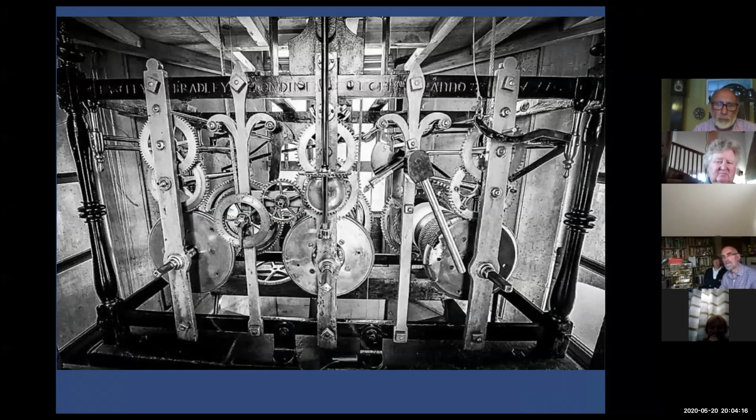He'd worked closely with Christopher Wren on several of the city's finest churches, such as St Magnus the Martyr on Lower Thames Street in 1709. In 1711, he manufactured and installed a clock at Hampton Court Palace to drive the ever-troublesome astronomical dial, and manufactured the wonderful clock as can be seen in this slide in the Townsend Tower of Blenheim Palace in 1710.

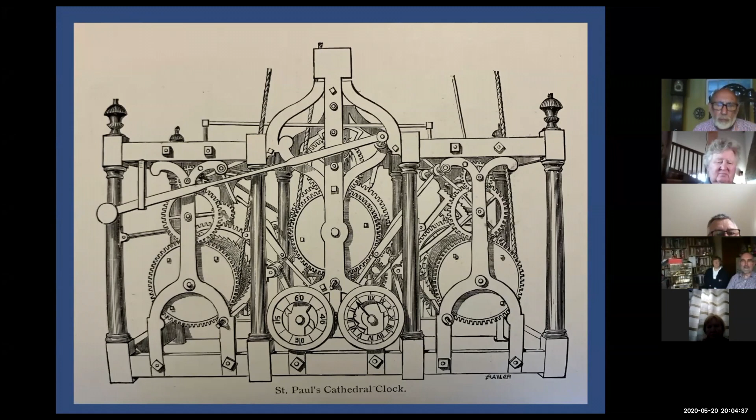But without doubt, the jewel in his crown was the clock he built and installed at St. Paul's Cathedral in 1707. Sadly, this clock was removed when the existing Smith of Derby masterpiece was installed in 1893. All we have is this sketch in J.W. Benson's book, Time and Time-Tellers, along with the original specification supplied by Langley Bradley, that leaves us in no doubt.

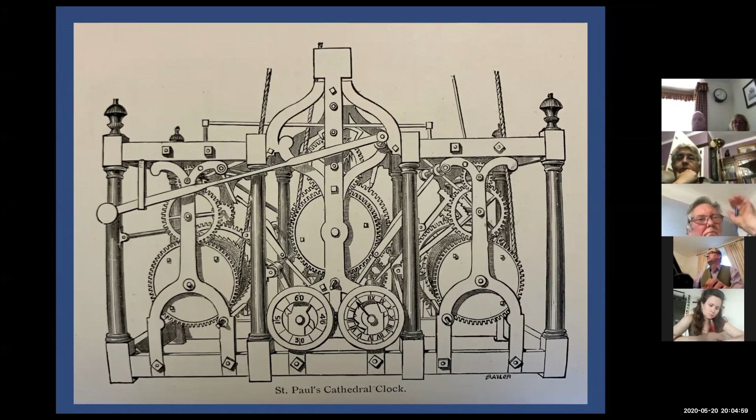I'll read the specification. The frame of the clock to be made of new iron, in height 6 feet, in length 8 foot 7 inches, and in depth 2 foot 6 inches, and the said frame to be well and sufficiently braced, the 4 corner pillars to be turned, and the base to be 4-inch square, and brass urns on top of the said pillars. All the wheels to be made of brass, the great wheels to be 2 foot 6 inches in diameter.

And about 1 2/3 inches in thickness. The second wheels to be 1 foot 6 in diameter and about 1 inch thick, and the third wheel to be 1 foot 3 inches in diameter and proportional in thickness. All the pinions to be hardened, all the holes wherein the pivots work to be stopped with hardened brass, collets to be turned on the foresaid, barrel caps to be brass and about 20 inches in diameter, to wind up brass wheels and hardened pinions.

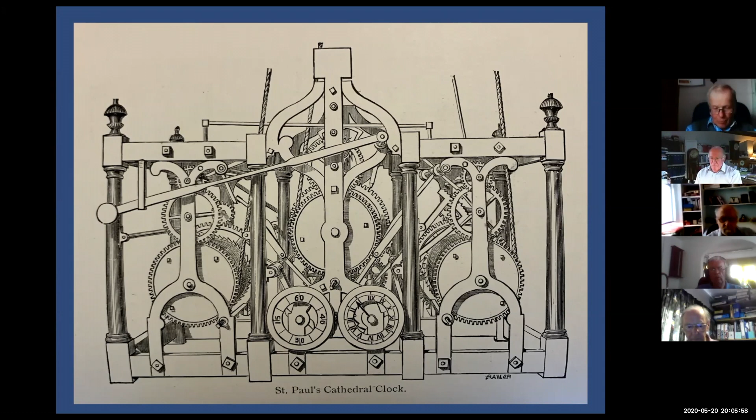All the dial wheels, roundels, dial centres, dial work to be made of brass with a fair dial plate marked on the movement to show the hours, minutes and seconds within the tower.

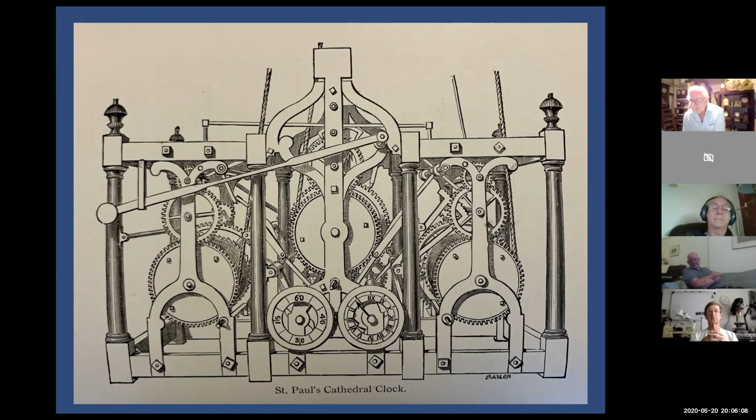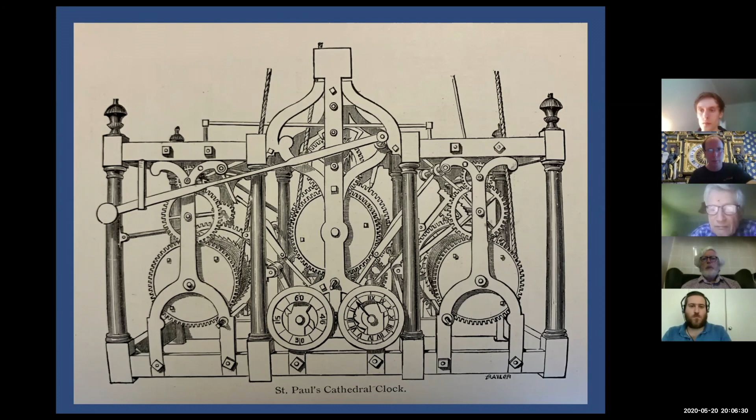I've also found recently another reference in J.F. Kendal's book, A History of Watches and Other Timekeepers, which confirms the description just quoted, but interestingly also informs us that the frame and the columns, rectangular base plate and the supporting entablature were made using cast iron, one of the first examples of this material being used in turret clock manufacture.

And I think we can all agree it would have been a wonderful mechanism.

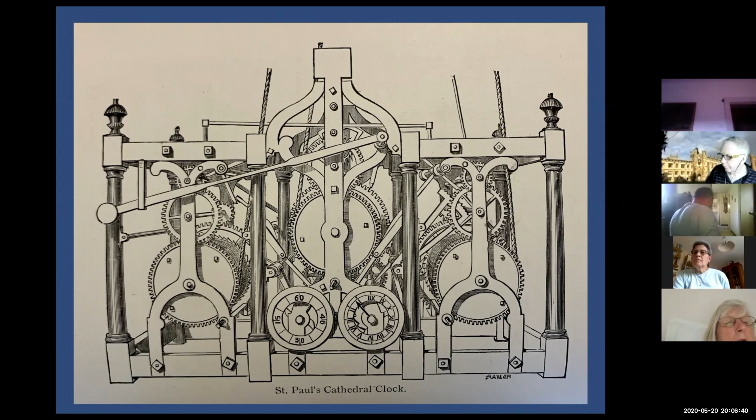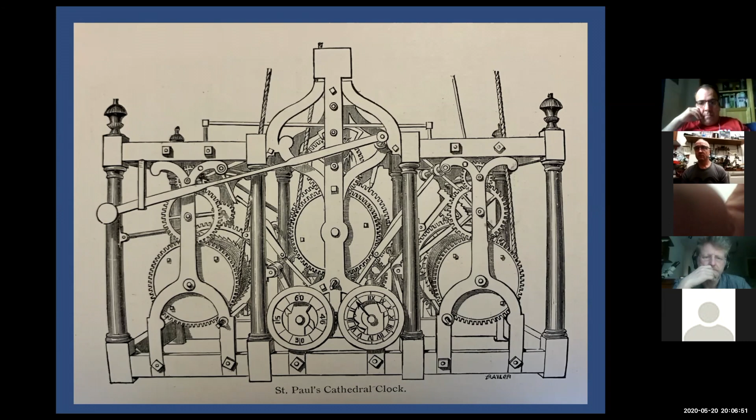A little bit more research I'm doing on this subject, and it looks like when this was taken out, it was put in Thwaites and Reed's workshop for quite many years, where people would go and see it before it was scrapped for the war effort. But that's another story which I'm working on.

But again, it's Langley Bradley's early days which we need to look into and understand how his expertise in turret clock horology developed and passed down to Aynsworth Thwaites.

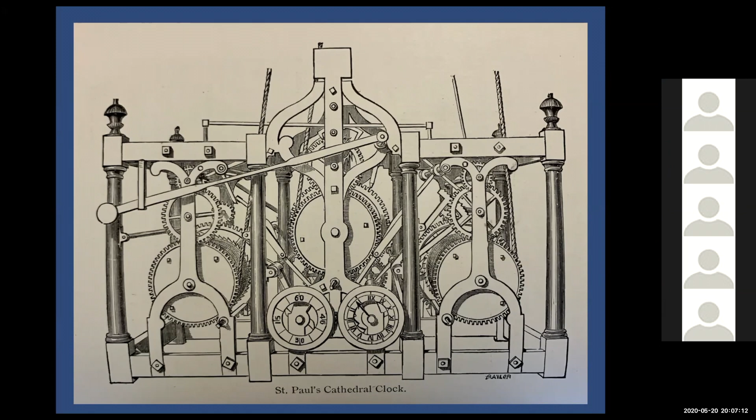Langley Bradley was bound to Joseph Wise in 1687 at the age of 16. Joseph was the son of John Wise, who we know manufactured turret clocks, as he was one of the 4 clockmakers who competed for the manufacture of the clock at St Dunstan's in the West in 1671.

He didn't win the contract, but he did go on to manufacture the clocks at St Dionis in Fenchurch Street, St Sepulchre in Holborn in 1671, and possibly the oldest clock in the City of London, St James's Garlickhithe of 1683.

Langley Bradley was freed in 1695, and it would appear it was then that he set out on his own, as William Derham, the author of The Artificial Clockmaker, is quoted as saying, 'I owe much to the assistance of Langley Bradley, a judicious workman in Whitechapel who drew up a scheme of the clockmaker's language.' Langley Bradley was without doubt a skilled clockmaker and experienced in the manufacture of turret clocks.

But to be successful in business, you also need a bit of luck. And without going into too much detail, this came in the form of the marriage to Anne Wise, the widow of his master's brother, Thomas Wise, as it is thought that the arrangement could have been made whilst Thomas was ill, because Anne's remarriage took place only a few months after his death.

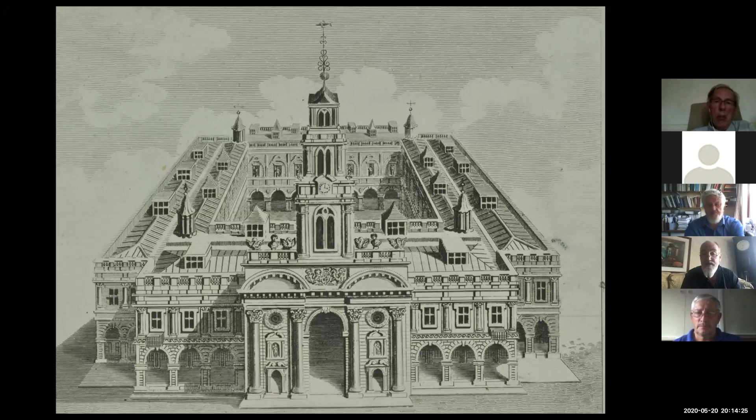This was certainly the case with the Royal Exchange, one of London's most prominent buildings, as by 1754 he was recorded as looking after this very troublesome clock that had caused Langley Bradley, in 1743, to be admonished by the Gresham Committee for not taking care of his duties because of problems with the chimes.

The original clock was made by Edward Stanton and installed on Lady Day in 1671. Stanton went on to become the master of the Clockmakers Company in 1696.

This was without doubt a very impressive clock for its time, as the Grand Gresham Committee demanded the following: a substantial workman-like clock, the bigness upon the square to be 5 foot, the height about 3 foot, the barrel of iron to be 3 foot in diameter with six tunes, such as shall be liked of, the rest of the work to be proportional, going for 30 hours, that it shall strike the quarters on 4 bells, and that it shall strike the hour, that it shall repeat at the half hour. This was probably one of the first clocks to use 4 quarter bells in England.

Over the next 30 years, Aynsworth spent a considerable amount of time and supplied numerous reports and quotations for the necessary repairs and adjustments, all of which are still in the ownership of the Mercers Company. In 1786, Aynsworth manufactured and supplied a new clock with a set of chimes, and the details are in the day books.

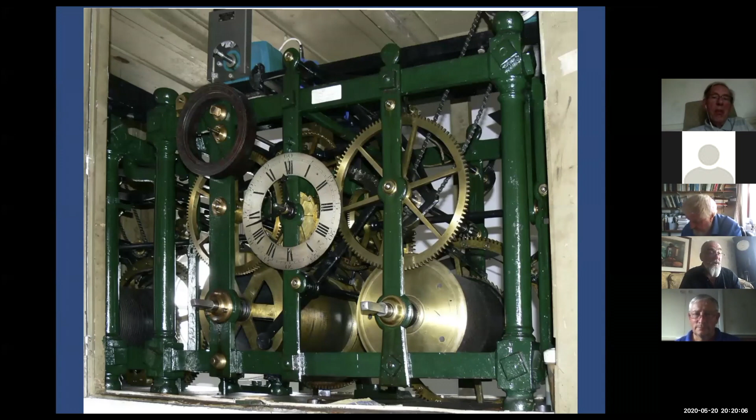The new clock supplied by Aynsworth Thwaites, as seen in this photograph, is completely different from the Thomas Herbert clock that was reconditioned by Mr. Seddon. The main differences are that it has a ting-tang quarter chime, and also something not so evident, the use of cast iron in the construction of the clock frame itself.

Cast iron, as I've already explained, is not often found in clocks of this period, but it was used by Langley Bradley in the construction of Blenheim Palace in 1710, and also the massive clock at St. Paul's Cathedral. But a majority of his clocks were manufactured from wrought iron strip bar. So Aynsworth would have been aware of the material and used it when he built St. Michael's clock in 1764 in Charleston, and I am of the opinion that Aynsworth would have used cast iron on the larger clocks, as it would offer greater stability, as the end sections could be cast in one piece and the horizontal bars mortised into them.

To drive large dials and strike big bells, you need a large turret clock. They require heavy weights, and any twisting of the frame needs to be avoided.

Those familiar with the work of Benjamin Lewis Vulliamy will notice his improvements, in inverted commas, to the Horse Guards clock. But thankfully, most of the installation remains the work of Aynsworth Thwaites. Without doubt, in 1756, this would have been the jewel in Aynsworth Thwaites' crown, and rightly so.

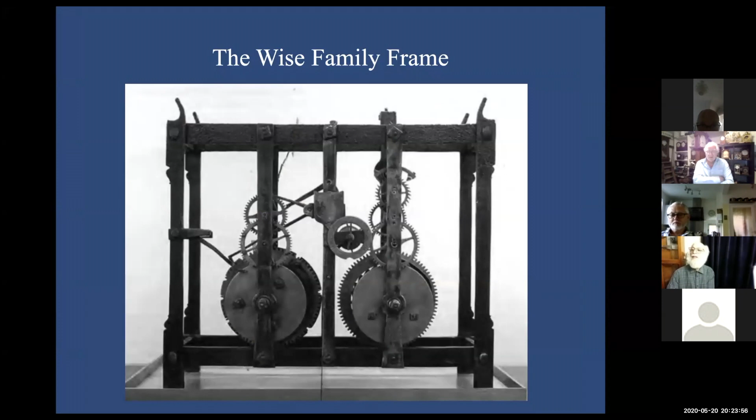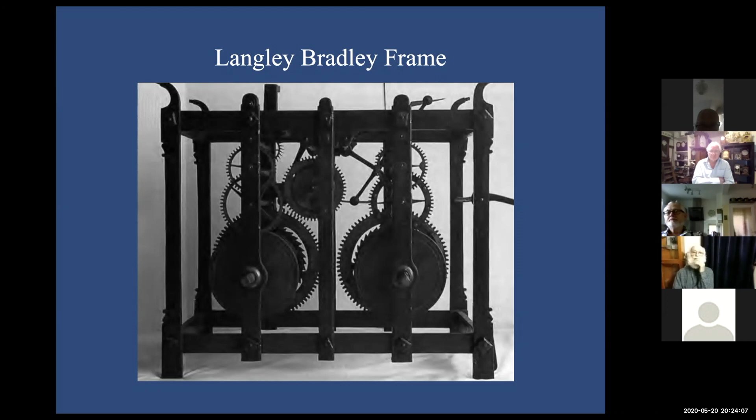This is a Wise family frame, and you can see the ogee mouldings on the sides and the horns at the top. And this is a Langley Bradley clock, and you can see again that the four corner straps are incredibly similar.

I've only got two examples of clocks which I'm confident are made by Aynsworth during this Crowther's Well Alley period, both for other clockmakers: one for Julian and the other for David Hubbard. You can see the tulip designs on this post, and on the Hubbard clock you can see the same type of design.

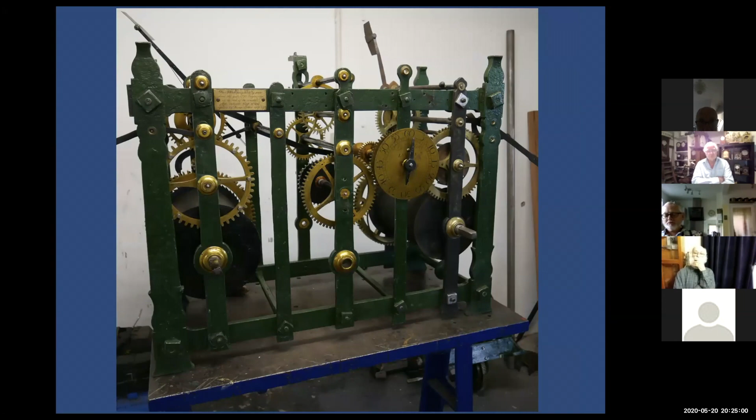What I also found very interesting about the David Hubbard clock is the handset dial. One side is marked out for the single hand and is signed David Hubbard, circa 1750, and you can see that that's quite evident. On the other side, when you turn it over, it shows the hand set for minutes, engraved for minutes, with his name repeated alongside an explanation of the work undertaken in 1792 by Aynsworth and his son, John.

I don't believe that this was to save money, because Aynsworth would have had a brass foundry - we know he had a brass foundry in his workshops - but perhaps in some way to pay homage to a previous customer. For whatever reason, I find it a nice touch.

So now we come to the very important date in the history and development of Aynsworth Thwaites: the move from Crowther's Well Alley to the famous Rosoman Street address.

This move must have taken place between 1757 and 1759, and my reason for this is that a certain John Thwaites, who has a large part to play later in the history of the company, was christened on the 7th of August 1757 at St Giles Church, Cripplegate. In 1759, on the 22nd of March, Elizabeth Thwaites was christened at St James's, Clerkenwell, a stone's throw from Rosoman Street. So we know that it was around this time that he moved with his family and set up his workshop in Clerkenwell.

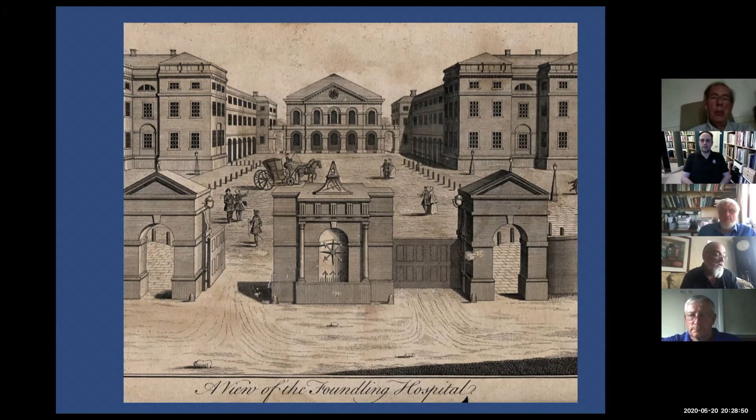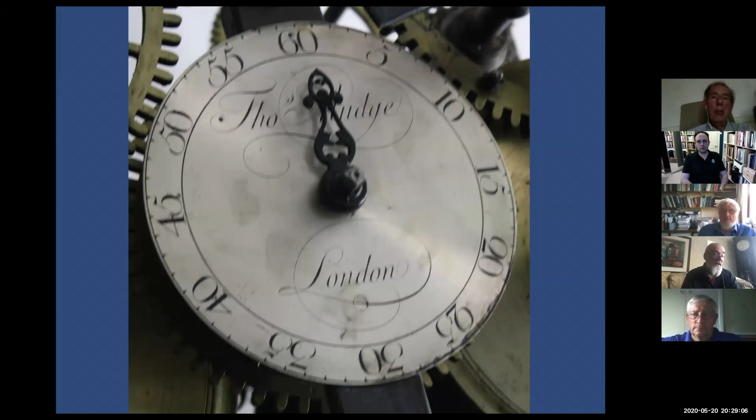The next clock I have any details about, made soon after he moved into his new workshops, is this wonderful example made for Thomas Mudge at Bayfordbury Mansions in 1761, which shows that he must have been held in high esteem to attract customers such as Mudge.

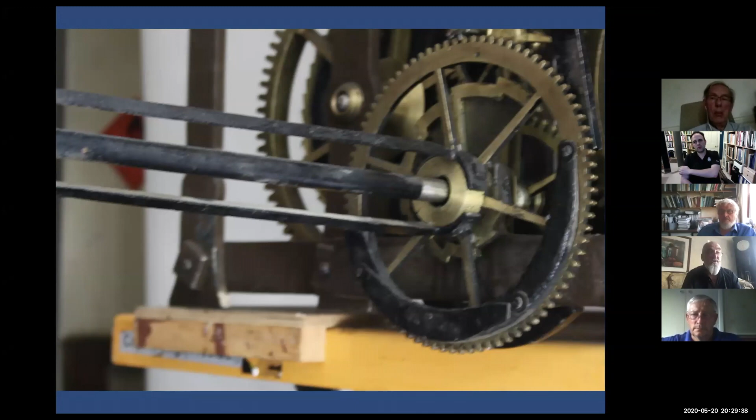You can see from the design of the frame that it's the same as the others he made at Crowthers Well Alley workshop, with a tulip shape forged into the corner post. Another trait I associate with the clocks of Aynsworth Thwaites is the hour pipe, or rather the lack of a pipe for the hour hand. I'd suggest this was an easier way to support the front and back bearings of a minute rod than trying to fabricate from iron sheet or source a tube of the correct diameter.

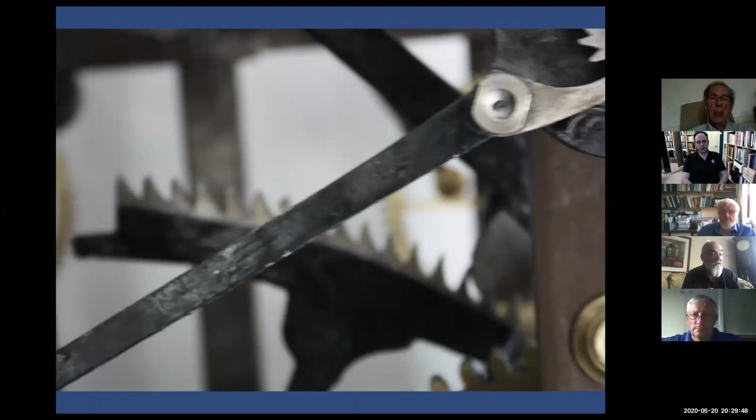Another interesting point in his development of turret clocks is his move from count wheel controlled striking to rack and snail controlled striking. To my knowledge, he was the first clockmaker to use this in turret clocks—perhaps just to be different, or to stop people caring for the clock from setting the striking incorrectly. But the design stuck and was used by Thwaites and Reed right up into the 1880s.

One thing which cannot be seen in this image is the horizontal lenticular pendulum bob, which we're all very familiar with on the Tompion clocks in the octagonal room at the Royal Observatory. You don't find many turret clocks with that on.

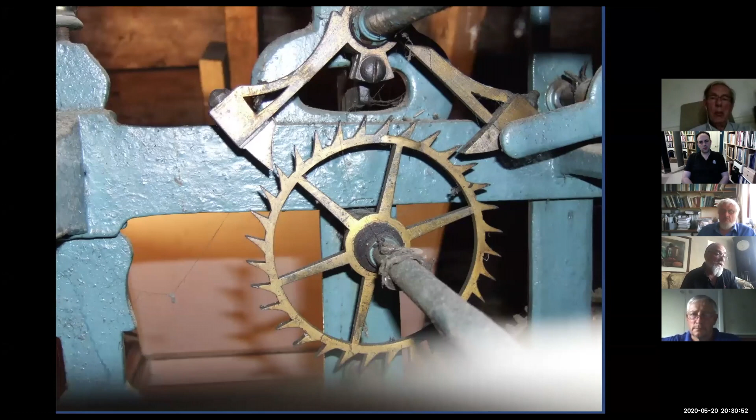Another very interesting example of his early work is the redundant clock at Morven House, Potter's Bar. Sadly, somebody has removed the handset dial, but the clock has some very interesting features which were unique to Aynsworth.

The first is his recoil escapement. This is a very early example of the pallet frame, which has been skeletonized, but the design remained the same all the way through Aynsworth's career and was still being used by Thwaites and Reed some 90 years later.

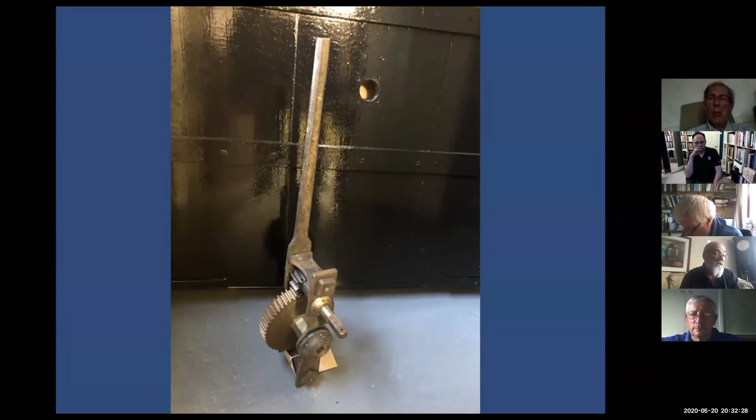In 1762, Aynsworth took on his oldest son, Benjamin Thwaites, as an apprentice, without doubt having great plans of succession, but sometimes things don't go as planned. This was very much the case, as 2 years later, in 1764, on the 25th of August, Aynsworth's new workshops were destroyed by a fire, and he wasn't insured.

This was reported in the papers on September the 21st, 1764, and I quote: 'Whereas it has been humbly represented to the King that on Saturday the 25th of August last, between the hours of 1 and 2 in the morning, a fire broke out in the workshops of Aynsworth Thwaites of Rosoman Row in the parish of St James's, Clerkenwell, which totally consumed the same, clockwork finished or nearly so, and also a great variety of working tools, engines, and other expensive utensils in the trade, and there is reason to apprehend the said workshop was wilfully and maliciously set on fire by some persons unknown.'

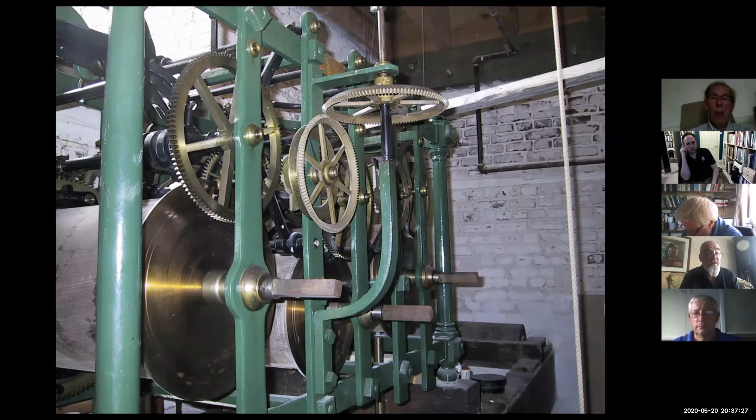We know from our records, or from the records still held at the church, that the Aynsworth specification and costs were as follows: a strong 30-hour clock to show the hours 4 ways, to strike the hour on the largest bell and the quarters on 4 bells as the Exchange London, in a strong iron frame, the great wheels to be 20 inches in diameter and the rest in proportion, the pinions hardened, with ropes, pulleys, hands and packaging, £120. 4 copper dial plates of 6-foot diameter with strong iron rings and bolts with nuts and screws, painted and gilded in the best manner and packaged, for the sum of £74.

The 8 bells were cast by Lester and Pack, later to become Whitechapel, at a cost of £581, over 4 times the cost of the clock. Around the 20th of March in 1764, the clock and the bells were loaded upon the ship The Little Carpenter, and set sail to Charleston.

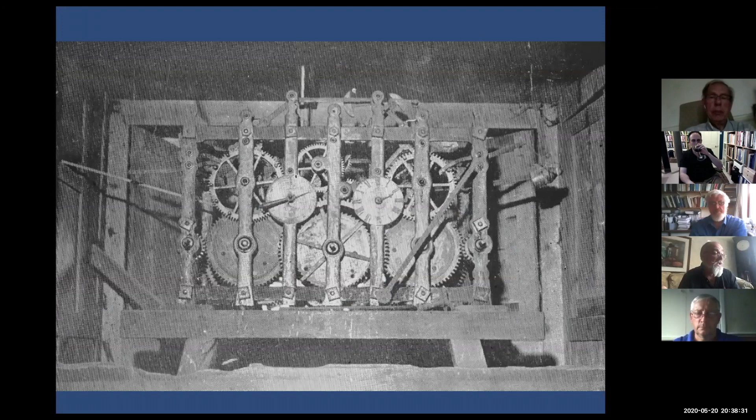Aynsworth then continued to make more clocks, and in 1765 he made this wonderful quarter clock for Mudge and Dutton, installed at Croome Court, Worcestershire. It is a delight, only measuring 2 foot 6 inches in height, 3 foot 6 inches wide, and 1 foot 6 inches deep, with Aynsworth recoil escapement impulsing a 6 foot 6 inch pendulum. The ornamental dial was designed by the celebrated architect Robert Adam.

The place has been converted into flats, and I'm given to understand the clock is still there, but I don't know if it's working or not.

In 1767, he exported another clock to the Royal Naval Dockyards in Nova Scotia. Three years later, Benjamin Thwaites was freed from the Clockmakers Company, and two years later his younger brother John Thwaites was bound to his father Aynsworth. So the dynasty of the family started to develop.

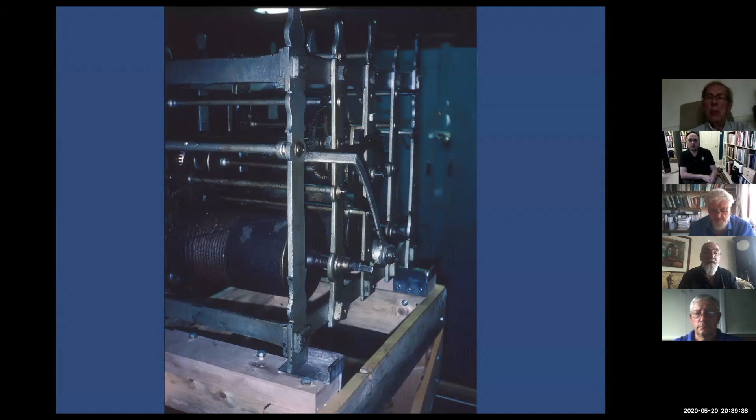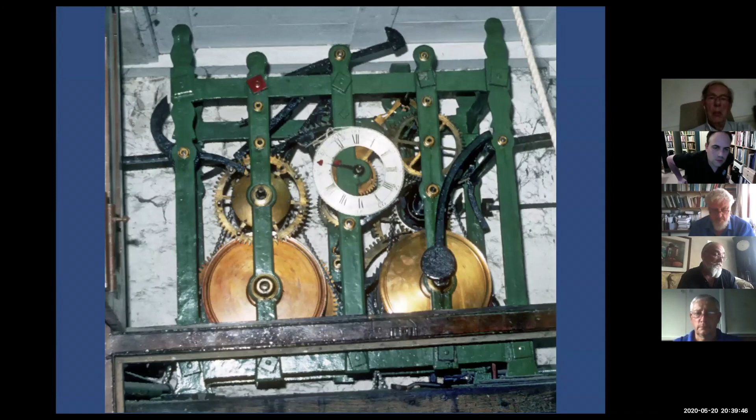And another one of 1775, or around that period, is this one from St Oswald's Church. I really like the photograph of this because it shows that they've got a rope weight line, and I would hazard a guess that it's never had a wire rope on it and is working as it was originally designed. This one also has the second arbor winding.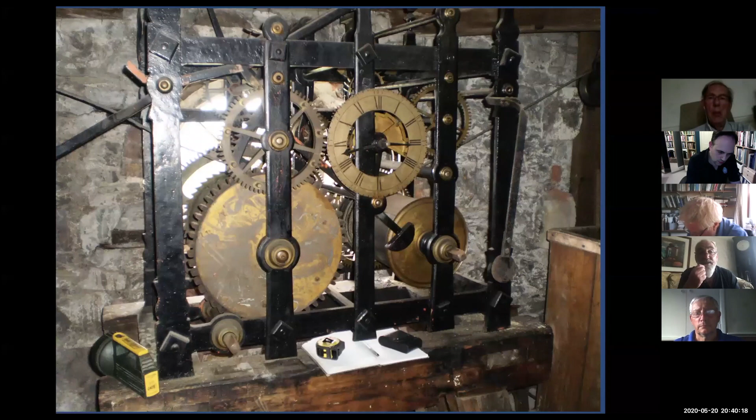However, a year later, he had moved away from that and had gone to using a winding jack in the corner. Perhaps this is because it wasn't strong enough. The same applies to this clock, which is the Clapham Parish Church clock of the same year. I think, for whatever reason, he abandoned the second arbor winding.

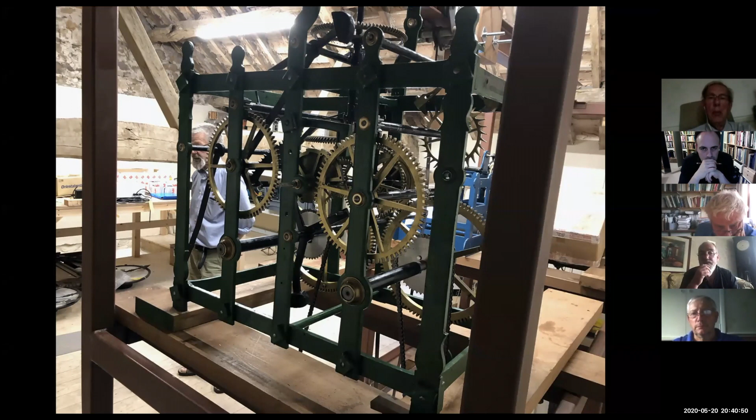Sadly, this clock was converted by Dents in the 70s, I think, and the barrels were removed. We recently had it in the workshops and changed it to wind off the barrel arbors rather than the second arbors, which Dent had really done. There's little doubt that he produced many more turret clocks during this period, but sadly I've not found many of them, and they've either been replaced or destroyed.

We now come to perhaps the richest vein of information we have in respect to the production of Aynsworth Thwaites. This is his day books in the Guildhall Library here in the City of London, which starts from 1780 and runs all the way through into the early 20th century. I'm sure they are familiar to many of you, and I think we are very lucky to have them still in existence, as they give us an insight into the horological workshop from that period of time and a better glimpse into the working life of Aynsworth Thwaites.

For those of you who have not had the opportunity to see the daybook, this is a sample of one of the pages, and from the very detailed information you'll also notice that the costs are included, but in code. This is the code. It's very simple, based on his name. So if you had AY lowercase b RN, that would be equal to £120, 7 shillings and 3 pence.

The records give us the names of the clockmakers he did work for, and it reads like a who's who of the horological world at the time. They include Vulliamy, Ellicott, Cumming, Dwerrihouse, Green, Dutton, Fitter, Harrison, William Harrison, just to name a few.

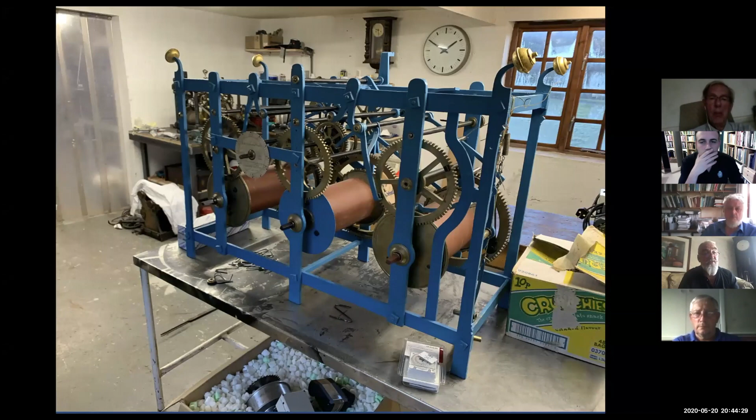Two examples come to mind. Firstly, the Langley-Bradley clock of St Margaret's, Westminster, which happens to be in our workshops, where on the handset dial you can see a record of the work undertaken. And here's the handset dial. You'll notice the recent one from 2008 to 2009, but you'll see one there repaired by Thomas Bray, 1781 and 1802.

If we go into the day books, on the 13th of March 1780 you'll find this entry: cleaned a 30-hour clock and chimes at St Margaret's, Westminster, a new fly pinion to the quarter part, new pins to the quarter wheel, a new nib on the locking detent, two friction rollers on the dial work, and moved the dial pinion, put a tooth into one of the dial works.

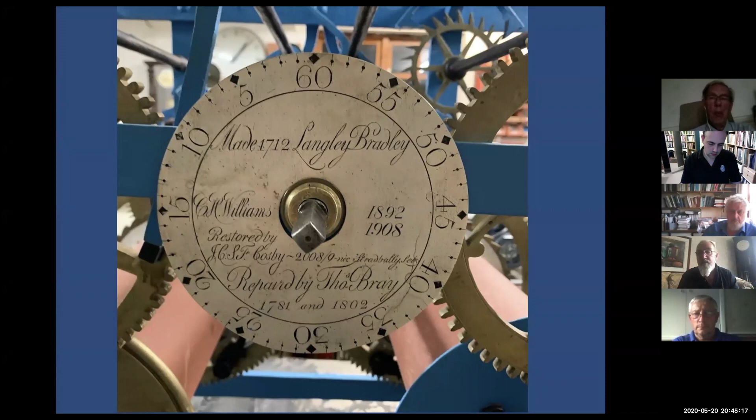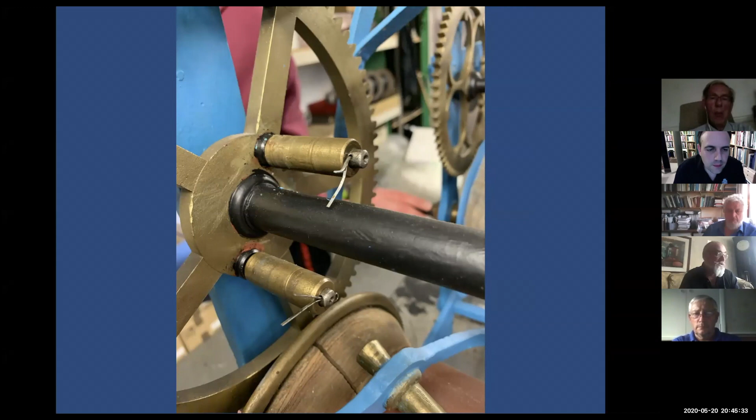Because we had the clock in the workshop, we were able to look and see the fly pinion which he made, these are the two lifting pins he's discussing in his day book, and this is the locking detent that he added a new nib for.

For me and my colleagues in the workshop, this gives us a direct connection not only with the clockmaker Langley-Bradley, but also to Aynsworth Thwaites and his workmen and his workshops, making you feel part of something much bigger, and a duty to undertake your work so it lasts for the next 238 years.

Another example is a clock we saw on the last AHS London tour, this clock at St Mary Woolnoth. The frame has many of the characteristics of clocks made by the Leonard Tennant school of clockmaking from around 1620, but it is evident that it has been converted from end-to-end to side-by-side trains, and proudly engraved on the handset dial is the following.

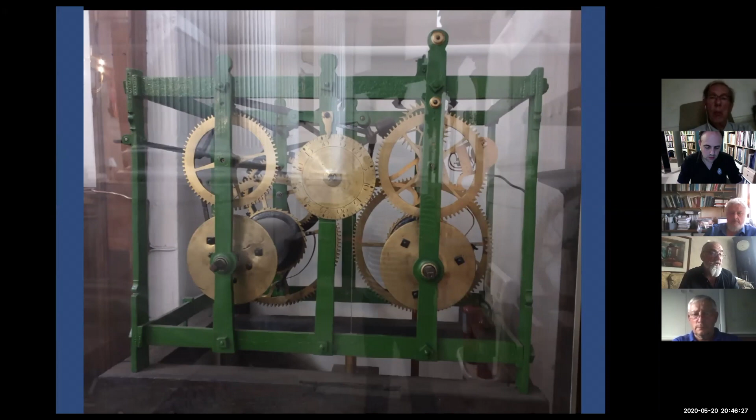Not a brilliant photograph, but it reads: repaired and minutes added in 1786 by Aynsworth Thwaites. If we look in the day books again on the 12th of July 1786, we get to see much more detail, which helps us identify other work, other Aynsworth clocks for which we didn't have so much information.

In that day book, it describes how he repaired a 30-hour clock, fitted a new swing wheel, added new pallets and a pendulum, repaired the chimes, stopped up the pivot holes, new centre wheel and arbor, new contrate wheel, rods and bearers, and this entire set of dial motion works.

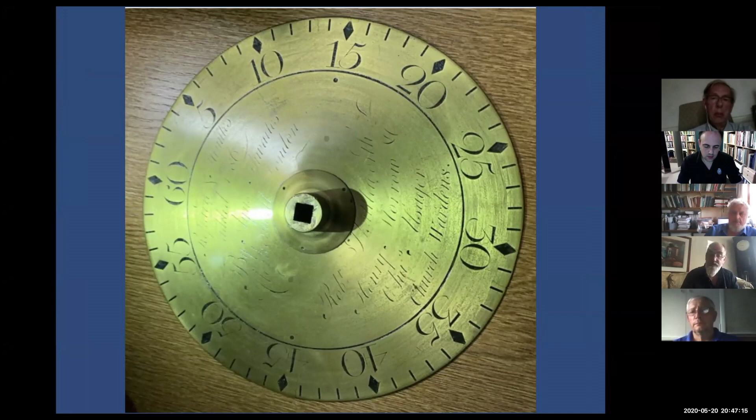He even went on to make a new set of hammers, new lines, new pulleys. He redid the dials - you can see the minute hand is unusual, I think that was the original hour hand. He re-gilded the dials, and did the carved work around the clock case, so it says. Really, you'd think it would have been easier to make a complete new clock.

However, there's one secret the clock had kept for many years: when you remove the handset dial, like the one on the Herbert clock, on the reverse you see the handset dial for a single-handed clock.

Some may say, again, it's to save money. Others that he was showing respect to the original clockmaker. Perhaps at the end of the day, it was a bit of both.

There is a very important date covered within this period, and that's the death of Aynsworth Thwaites' first son, Benjamin, in 1789. John had been freed from the Clockmakers' Company in 1782, and I'm sure Aynsworth must have had in mind that it wouldn't be long before his sons would eventually be running the company, allowing him to perhaps retire after his long and successful career.

But before I dilate on what happened, I would like to discuss one of the very important clocks, one where the dates have been somewhat misquoted and which the day books have helped us correct. That clock is the one at the Greenwich Hospital.

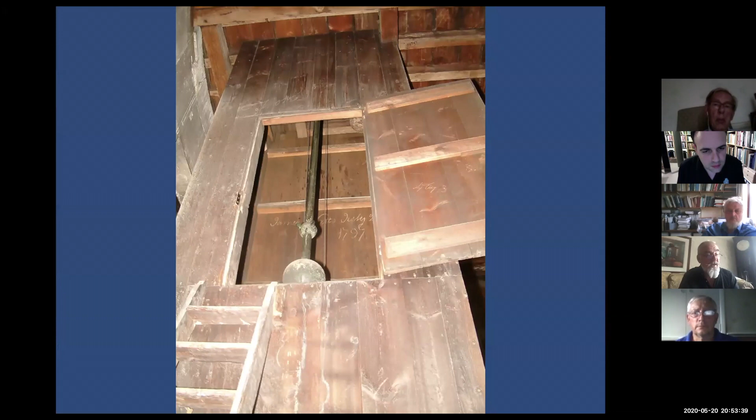A 2 seconds pendulum was employed with a wooden box and a sphere as a bob. A small auxiliary bob is used for regulation, as again can be seen. The double suspension spring is intended to reduce the pendulum's tendency to weave. Ludlam wrote that the pendulum should be bolted to a rock as big as the hospital. You'll see a wooden case protects the pendulum from drafts, and inside the case you can just see the signature of James Watt, 1797.

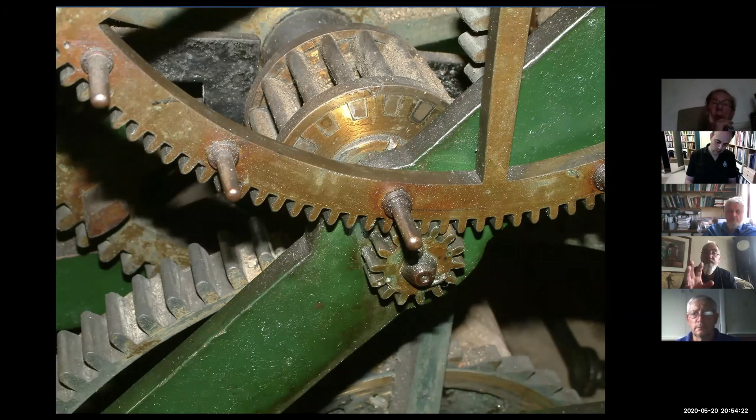This slide shows the construction of the pinions used by Hindley, something that was actually taken up by Aynsworth on some of the clocks that he manufactured later in his career. You can see how you've got the brass cage with the hardened steel inserts and the rings which hold them into place. A good way of producing a very accurate pinion relatively easily, and a large pinion.

Aynsworth never made any other clocks to the double frame design, or I don't know of any. It would be interesting to know what he thought of it, something we will never know. But it wasn't just turret clocks and domestic clocks that Aynsworth made.

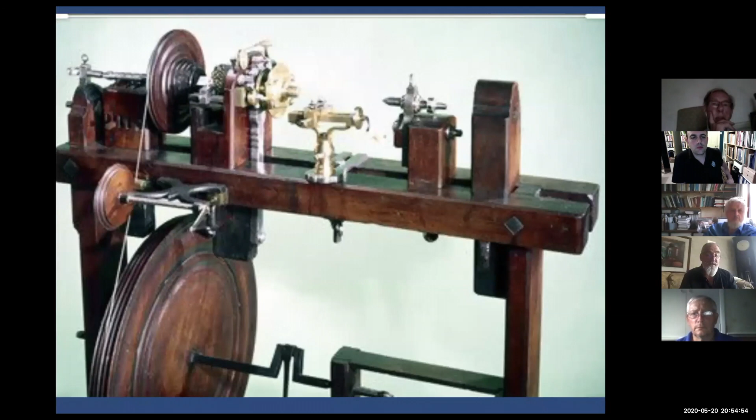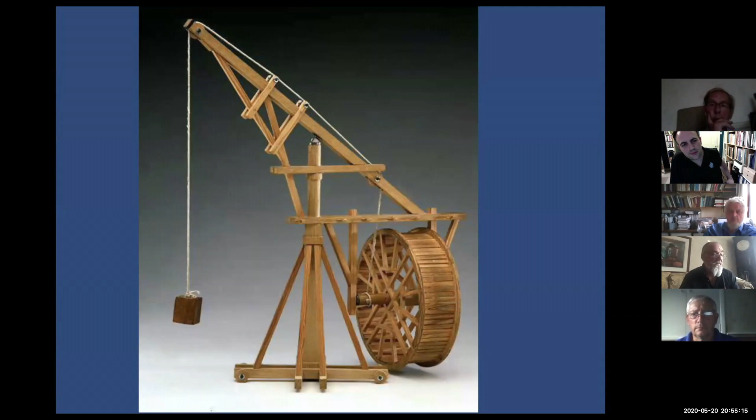On the 9th of February 1781, he made a lathe for Mr. Ellicott. He made numerous wind dials. He even, in 1783, made pinions for a crane. On the 9th of September, it is reported that he made a copper frame for Mr. Aubert. I had no idea what he made the copper frame for. On the 6th of October, 1784, he repaired a waywiser for Mr. Cummings, a device I'm sure you know for measuring distance.

He supplied a grinding wheel to Mr. Aubert. In the day books he cuts numerous swing wheels, normal wheels, worm wheels, weight lines and pulleys. He undertook vast amounts of organ work for Mr. Cummings, along with supplying him with turret and domestic clocks. Interestingly, Cummings settled his bill at the end of each year. All this goes to show that he must have had a very well-equipped workshop and a large and well-skilled workforce.

Aynsworth was a liveryman of the Clockmakers Company, but never made it onto the court and never became master. This is something his son John would go on and do, but for whatever reason, it was not to be for Aynsworth.

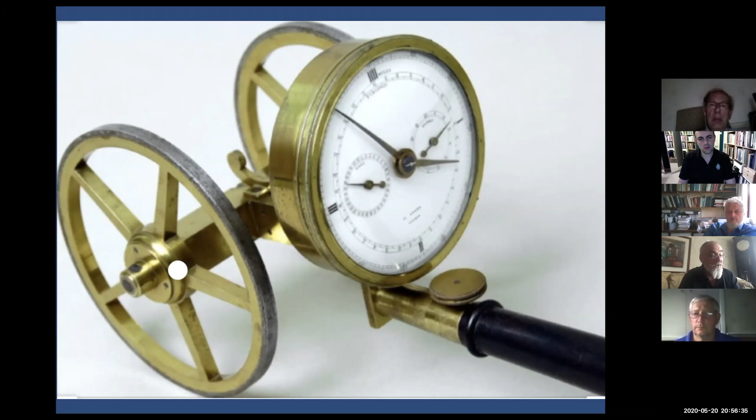Before I move on to this part of the story, I do need to address the production of domestic clocks, which we are aware were many in number. I'm sure there are many of you who have worked on several examples, but for me, in my field, it's not the case. However, I am aware that they are good quality.

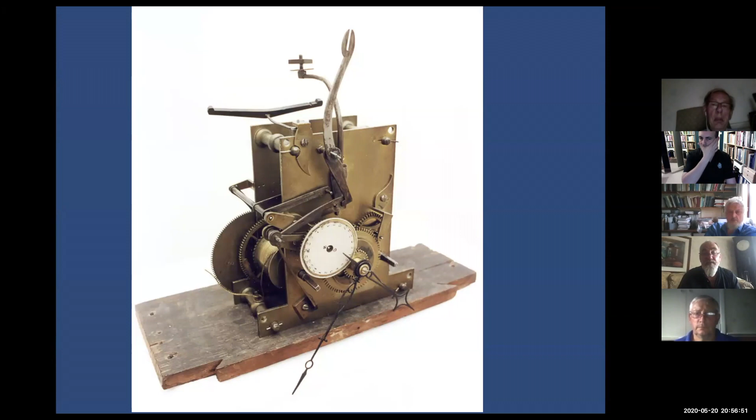And this is an example of one I was given these photographs of, showing you again that it was high quality. This is by Aynsworth and John. Anyway, that's enough of the domestic stuff.

So let's go back to 1789 and the death of Aynsworth Thwaites' oldest son, Benjamin, at the age of 42 years. As I alluded to before, this must have come as a complete shock and a cause of major readjustment in the family firm. In 1790, at the age of 33, John Thwaites went into partnership with his father.

In 1792, they made a clock with a gridiron pendulum for the University College, Oxford. Sadly, I've been unable to see this clock, but from Aynsworth and John's specification, it sounded very, very interesting. It had a gridiron pendulum of brass and steel fixed to the wall with a shifting cock on the front to adjust the hanging of the pendulum. I'm quite interested to see that because, for a clock of 1792 to have a turret clock with a gridiron pendulum, that's quite an interesting thing.

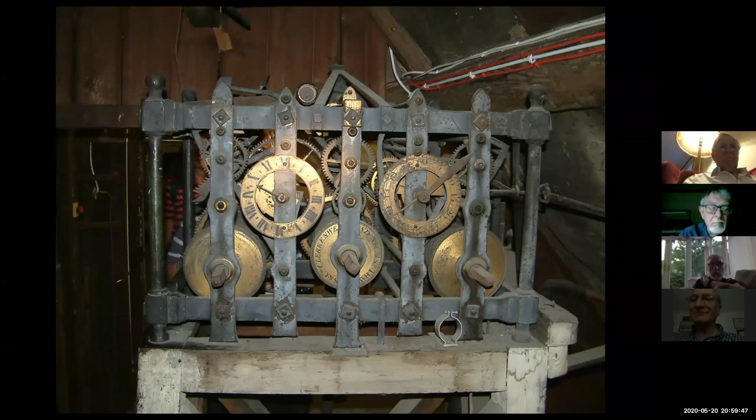And it was in that year of 1794 that clocks started to appear signed John Thwaites, as this one of Ham Park, West Sussex. In 1813, we see the first clock signed John Thwaites and Co. at Merton College, Oxford. Then, interestingly, in 1815, we find this clock from Whitechapel School, the first clock signed Thwaites and Reed, London. The foundation date is often quoted for the company Thwaites and Reed as 1820, but this clock proves that to be wrong, and that it is 1815.

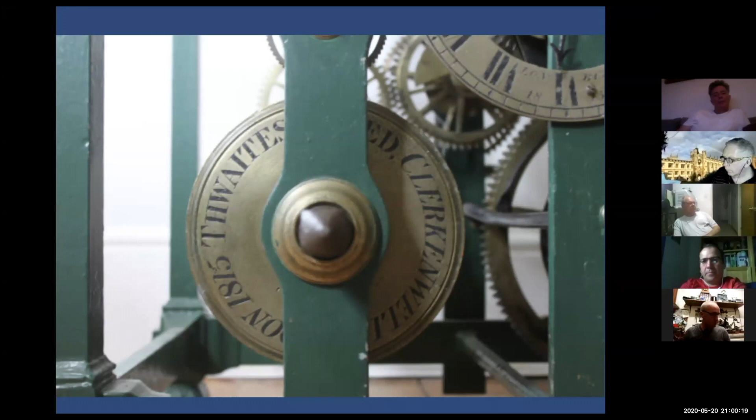In 1816, George Reed is freed from the Clockmakers Company, having already been in partnership with John for a year. Thwaites and Reed would go on to become famous throughout the world and become one of the biggest producers of turret clocks as well as domestic clocks for the rest of the 19th century, continuing on to this day. A fantastic legacy for one hardworking and very honest man, Aynsworth Thwaites.

Thank you very much.

So that's good. I can say thank you, Keith. That was really great and really successful. It must have been awful for you to talk to an empty room. So you did really well. Yeah, I bet. We were all happy. It was really lovely. Thank you so much, and thanks everyone for coming.